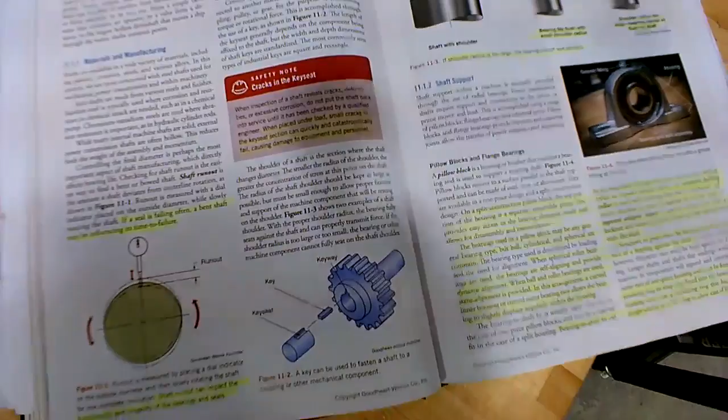So, some high spots in here. He said he was. He said he was going to join.

Okay, good. All right, so one of the ideas that we've already covered in gearboxes is the idea of checking run out with a dial indicator. They're showing here on this picture, seeing a shaft from the end of it, and then seeing the radial run out up and down like this if it has wobble to it. So that's the case no matter what you're checking.

If you go to something like this over here, you've got a rigid coupling here. If you separate these two, then you can check the run out up and down on the driven machine and on the motor the same way you did with the gearbox. You've got shafts, you can still have wobble this way, or the loose play in the bearings. So that stuff can be checked when you decouple them.

You can put a dial indicator here and then jerk up and down, or either rotate it, and you can check just by rotating it to see if the shaft's warped. You can check by jerking it up and down to see if you have a lot of loose play in the bearings. So that's your radial run out on the driven. Same thing on the motor end of it, but you got to decouple, take the screws out to do that. It's the same thing as what we did before.

You can check the axial run out. You got to decouple them, separate them, and put the dial indicator facing the shaft, and then pull in and out like that, and you'll check for worn bearings and all. So that's one of the preliminary checks.

Yeah, he's in. Hey, how you doing?

Okay, so anyway, they're just showing you that's one of the preliminary checks whenever it says run out. Run out is measured by placing a dial indicator on the outside diameter and slowly rotating the shaft. It can impact the functionality and the longevity of bearings and seals. So bearings and seals can be affected by run out issues.

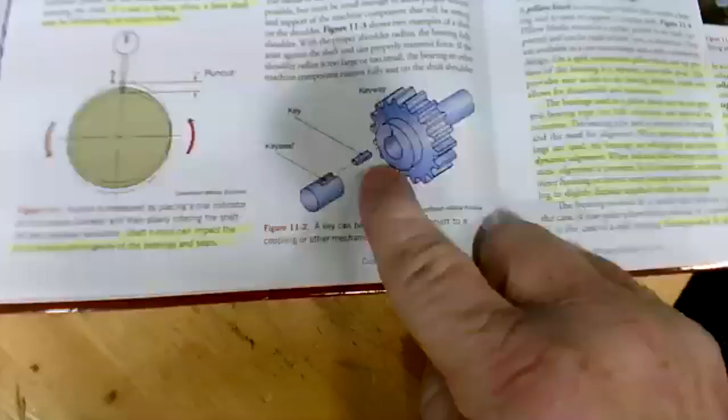If you've got keys that you're dealing with, you can look for a cracked key seat. The bed that the key goes in could possibly be cracked. That's another thing.

They get into different ways to support the shafts, pillow block bearings, showing the grease fit here. They're showing here how the bearing can fit against the shoulder of the shaft. Here you've got a 2-bolt flange bearing. You've got a U joint, or like a universal.

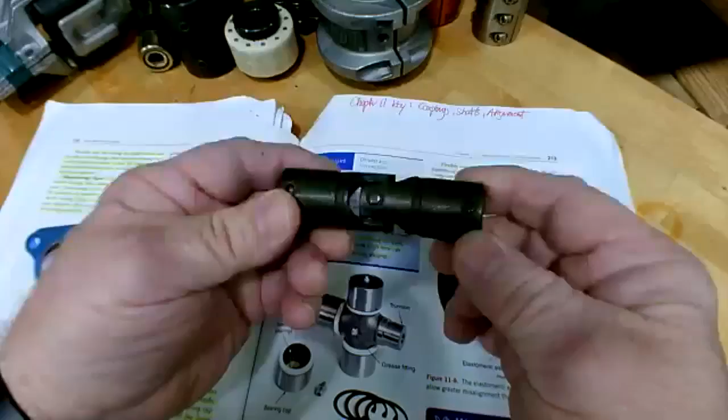Universal joints are like this one, to where you've got shafts, you got to drive something, but they're at an angle. So here you can drive something at an angle. I think like drive shafts on vehicles, you've got the universal joint like that, or knuckle like that. That allows for some misalignment there. And they're just showing you an example right there.

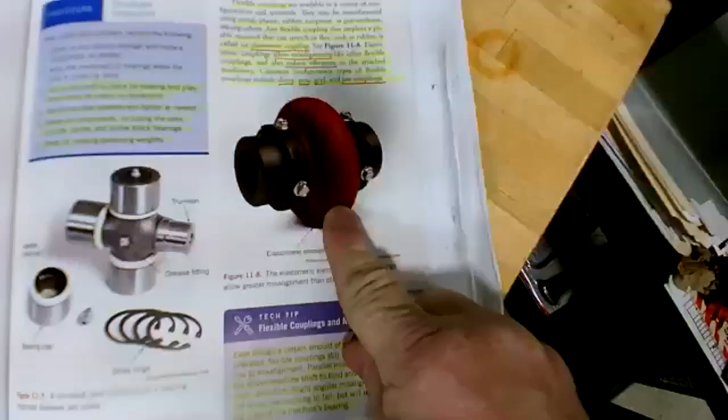If you read through all this stuff, here's another kind of coupling that has an elastomeric element in there. It's a flexible type of element that's going to dampen vibration, and it'll allow for a little bit of misalignment.

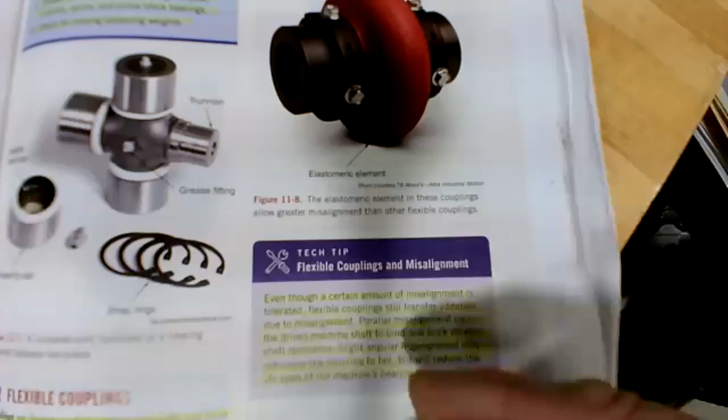It says here that for flexible couplings and misalignment, even though a certain amount of misalignment is tolerated, flexible couplings still transfer vibration due to misalignment. So even if you've got a flexible coupling, that doesn't mean you can tolerate misalignment, because a lot of misalignment means you're still going to transmit some vibration through that elastomeric coupling.

Parallel misalignment causes the driven machine shaft to bind and buck on each shaft revolution. Slight angular misalignment may not cause the coupling to fail, but it will reduce the lifespan of the machine's bearing. So you still want to shoot for perfect alignment as good as you can get it, even with an elastomeric type.

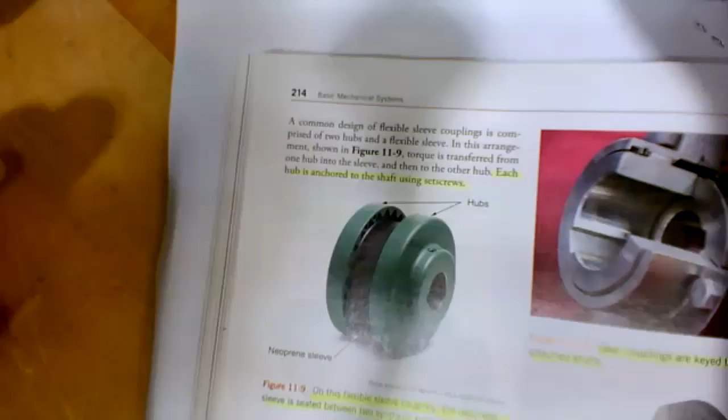Now here, you've got something called a sleeve coupling. It's got a neoprene sleeve between two synthetic rubber hubs. So here, we've got one right here, and it comes apart like that. That's something similar to that.

Okay, so that would be your element that you wear right there. If it grips, that's pretty neat. It's interesting how many designs people have come up with. So again, you've got set screws here that go onto your shaft, and that's a pretty neat invention there for design.

Then you've got something called gear couplings, and then you've got grid couplings. Grid couplings is something that I do have. There goes the gear coupling right there. I don't have one of those to show you, but I do have a grid coupling. So the grid coupling has a springy looking thing in there.

And let's go up. Don't get dizzy there, Brandon, with this thing floating around. So here you've got something called a grid coupling, and it comes apart. It has a shell, and there will be screws through there on each end, and there's actually a grease fitting here, so you would shoot grease into it. You have to put a grease fitting in there and pump it full of grease. And look at it, as that comes apart, there goes your grid.

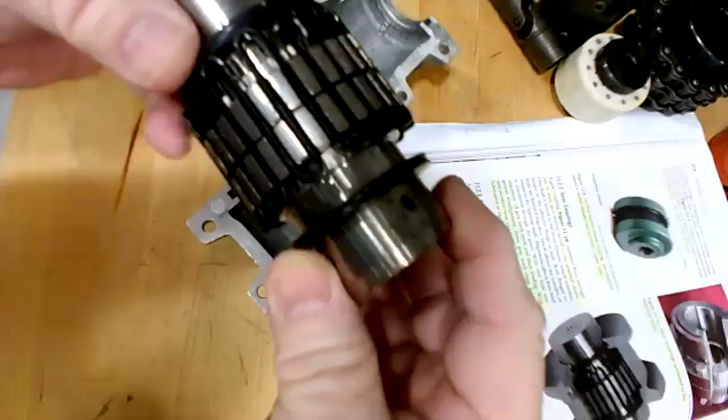And so it allows, you notice here, it allows some floating like that. But if this cracks and goes bad, of course you're going to be taking the shell off like that, and you would have to replace the grid itself. It also has seals in there, and the seals are going to try to keep the grease in there because it does have a grease fitting.

Right there, there goes your grease fitting in there. So it does need to go back in like that. You want to take a look, pass that around. You got those, okay.

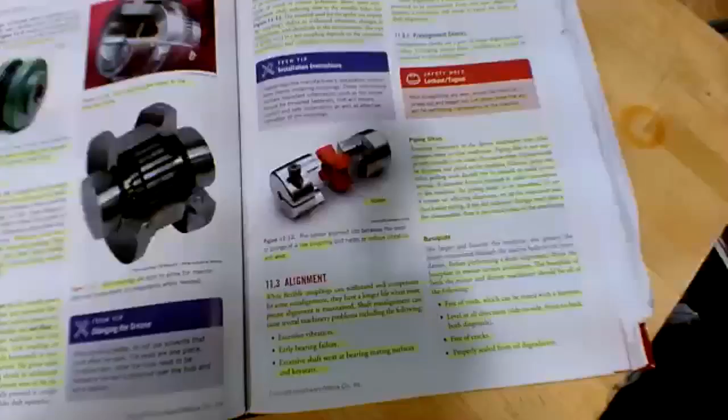Now, the next type of coupling here is called a jaw coupling. The jaw coupling is a three-piece unit that transmits power between two hubs. They're meshed together with the assistance of an intermediate element called a spider. The spider, made of rubber or various polymers, allows the misalignment while reducing wear to the metallic hub. The material used for the spider can impact the ability to withstand vibration, temperature, and chemicals. The type of spider used depends on your operation environment and your specs.

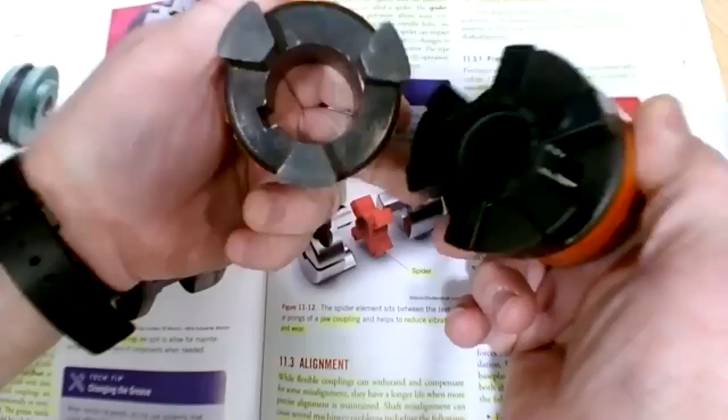So here we have a spider coupling. The brand of this one is called a Lovejoy. That's probably the most popular coupling that I've ever seen where I work. There goes the spider. And these just wear over time, and you start to get a whole lot of slop in there, a lot of backlash when they wear. You can picture that. That's easily seen there.

They work very well. They do allow some float, a little bit of misalignment. But you still want to be able to do alignment with them. You still want to try to align these. For instance, with a straight edge here. We're going to go with a straight edge method, and you'll put a straight edge across them, and you'll be looking for daylight under one or the other when they're bolted onto the machine. So in the beginning we go with a straight edge method, and then you can go dial indicator, and then you can go laser. So those are the three ways we're going to try to do alignment. So moving right along.

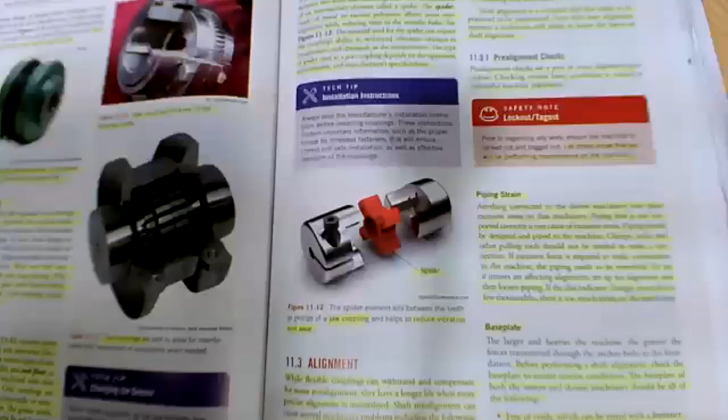There's some pre-alignment checks that you go through. Lockout, tagout is the first one, the main one. Checking for pipe strain is one of them. Anything connected to the machine may place excessive strain. Clamps, jacks, and other pulling tools should not be used to make connection. If excessive force is required to make connection, the piping needs to be reworked.

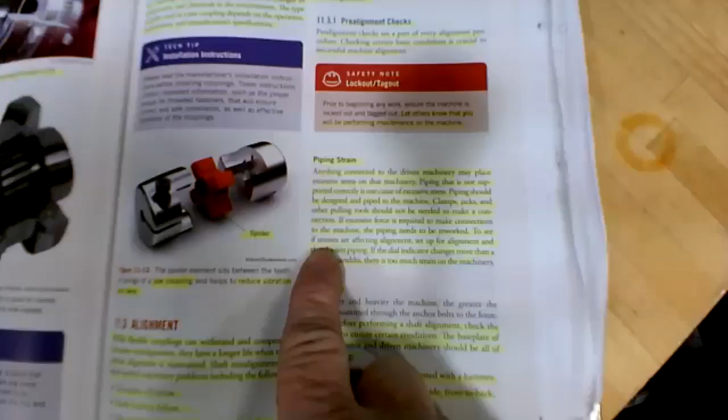To see if stresses are affecting alignment, set up for alignment and then loosen your piping, like maybe your unions. If the dial indicator changes more than a few thousandths, there's too much strain on the machinery. Does that make sense? So you can put a dial indicator on a shaft and then loosen the piping for the pump. And if you see a movement, then you got issues with your piping. So that's a good idea there for pre-alignment checks.

And then your base plate. Check the base plate for certain conditions, voids, make sure it's level, free of cracks, and sealed from degradation. Properly anchored with the appropriate hold downs, and that you clean it of any debris. And then checking the shaft run out, as I just said. The shaft run out is the same rules as it was with the gearbox. So your excessive shaft run out greater than 3 thousandths... just do all that.

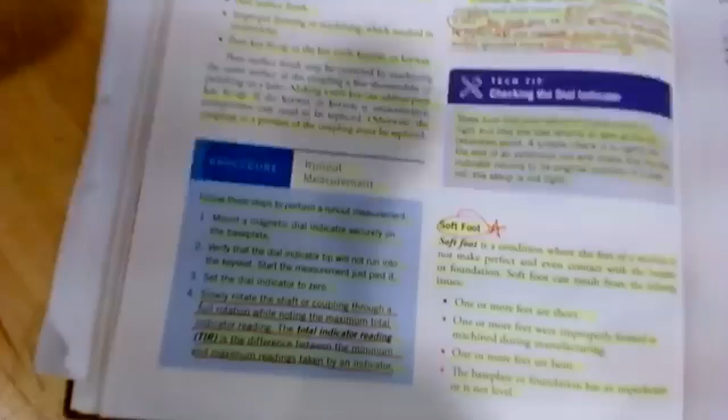Now, before we go further with that, there's some more couplings that they did not show in this book. Let's show those real quick, and then we'll get into doing an alignment. So you've got some rigid couplings that absolutely have no forgiveness whatsoever. See that? That's a plant coupling right there. It's got a keyway, and that thing's got to be dead on. Them shafts have to be dead on.

Okay. You saw the universal joint. There goes another rigid coupling there, with no play whatsoever. So that's rock solid there. Here goes an elastomeric type there, a different one. Pretty interesting, got a rubber feel to it there. Here's a different one here, just like a spider coupling. Like that, different brand.

Clamp, something like a square shaft. I've never seen one of those used on anything, but it's another variety there. And then you got something called chain coupling. This is very interesting here. So the chain coupling, your shafts would attach with set screws, and then you've actually got chains in there. You got some room for some float in here for the chain coupling.

And let's look at the, where's our, right here. Now, so there goes your master link. There goes the master link right there, and you pull. Oh, let's get the lights.

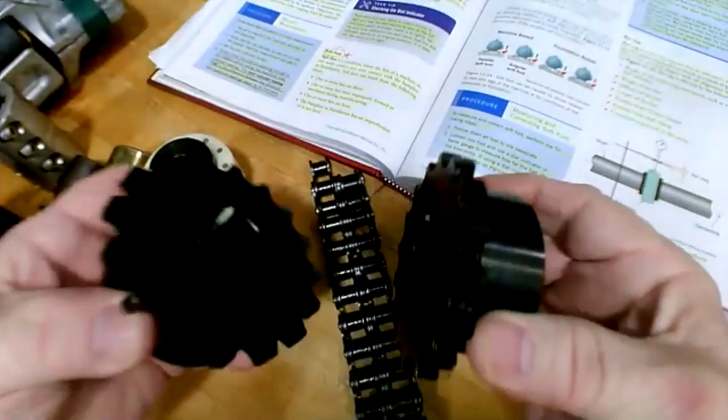So here you've got the master link for a chain coupling, and you pull that master link out like that, and it comes apart. So there you go, right there, and there goes your two pieces of your chain coupling. Let's get this up. Pretty interesting, huh? So it's like two gears, and you have a double gang chain there. That's actually the element that transmits the power. There goes your set screws there.

We'll line those up. You ever seen anything like that? Okay, you have. This thing's bad to the bone. In other words, like Ruben would say, that's bad to the bone there. You know, that thing ain't messing around.

What kind of machine do you have this on? My capper. And so what is it coupling together? Between the main gearbox and the drive motor. Okay. So it's pretty serious drive there. Real serious drive. Have you ever had one of these where the chains go bad? You got to keep them lubricated in our environment. Right, because you got wet chemicals and they're spraying them chains down with disinfectant every night on third. So they're getting some serious chemical attacks on everything in this plant. They last a long time.

Right. But isn't that interesting how somebody invented that? It's fascinating to see all the inventions that people come up with in just one subject like couplings, isn't it? To me, it's very fascinating.

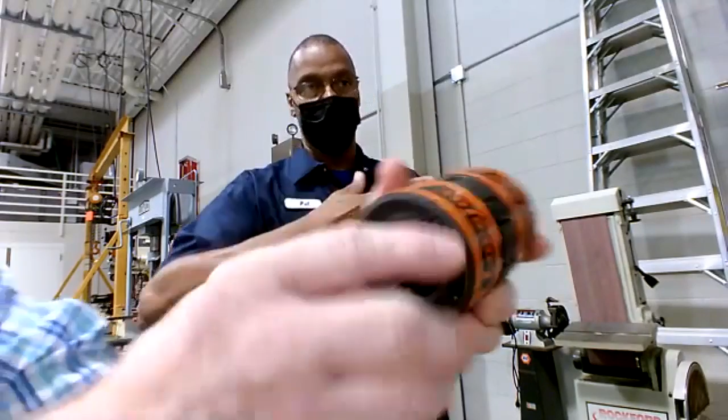We have to have those on the capper. So any slack at all will throw your timing off for the capper. Say that again. He can tell you from experience. On our cappers, we use this type of coupling because with the regular coupling, if you get any wear in it at all, it tends to float. It throws the timing off. So we have jars going through our capper. It has to be right on. If it's off just a little bit... That's what I mean. Got to be nice and tight. But yeah, it has to have some axial float a little bit, but not radial wise.

Okay, then this is just as much interesting here. What do you think that is at a glance? It's a nylon chain coupling. So with this one, we'll drive a pin out, and it doesn't matter which one we drive out. Looks like that one right there has been driven out before. So let me get something to drive that out, and we'll take that apart. Give me just a second. I need to get the small pin.

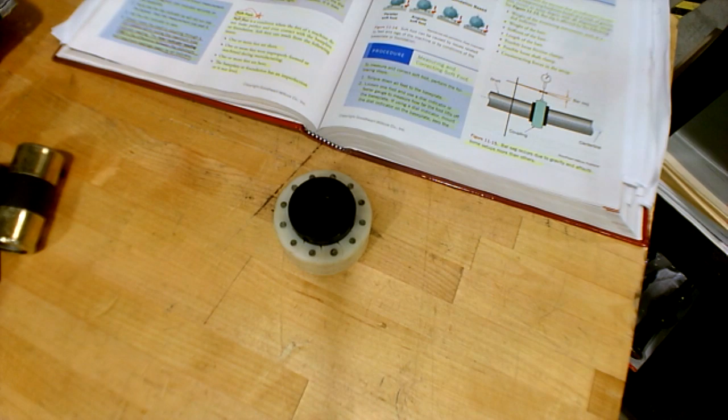Now, if y'all will drive one of these pins out, I don't think it matters which one. I don't see any difference in them, honestly, but that one right there's probably the one that's been driven out before. You can kind of put it up here where we can see what you're doing. And I'm gonna hold it like that. So we're using the flat pin punch.

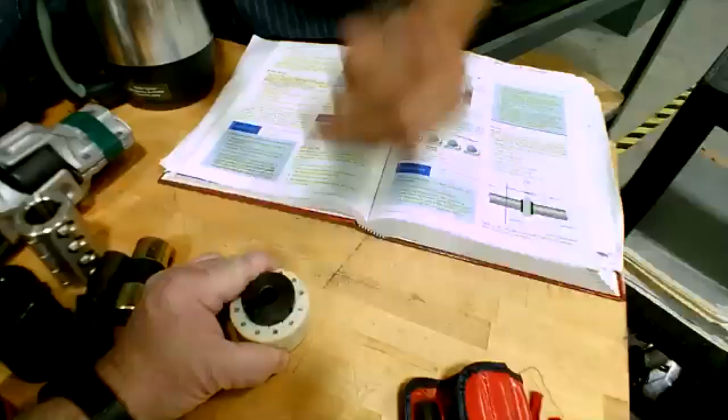Now we're gonna pull it out with some needle nose.

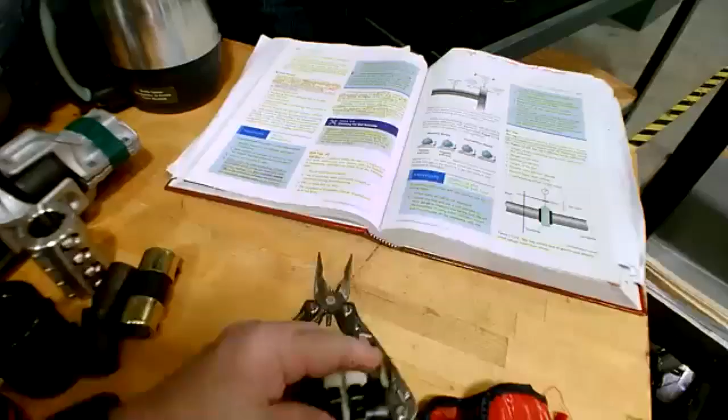And I'm hoping this one comes on out. Look at there. It's got some pretty good grip to it. If it don't make a wire out of it. Now, so we pulled that pin out. It's just going to come apart like a regular chain there. So there you go. You got the same deal there as with the metal one, but it's a nylon chain coupling. So ain't that something?

Interesting. Nylon chain. So food processing, that may be the thing for you. Chemicals. Pretty interesting, huh? Set screws here. You got a set screw coming in right behind the keyway. So that's to keep the key from slipping out. And then you got another one to bite down at a 90-degree angle. They come in from two angles with the set screw. So that's pretty good design there.

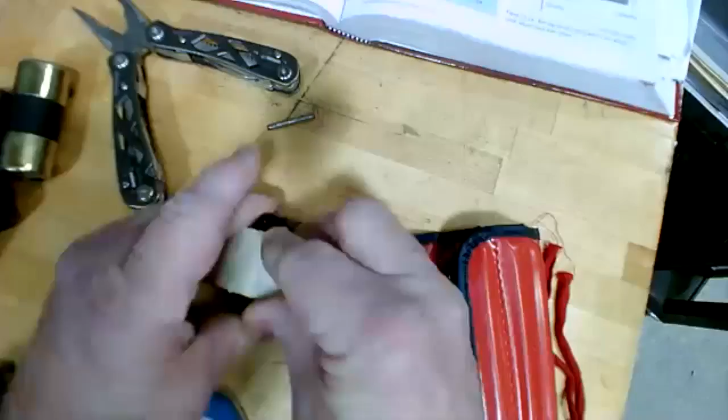We'll line those up like that. Close it up like that, and we're going to drive that back in. If you want, you can use the pin punch maybe to align them better. Look at there. So there you go, chain coupling. It's got a little bit of float to it. Anyway, so that's another variety there.

By the way, that was a set of Proto pin punches there. Real handy. These can be used for not only knocking out pins, but they can be used for lining up flanges like drift pins. If you don't have drift pins to line up flanges and you're doing pipe fitting, you can use these in place of drift pins. So that's a handy thing to have. It's not real expensive, and you don't have to buy something separate called a drift pin. So that's a pretty common thing to have in your tool case, toolbox.

So next thing is we'll go to a basic... one of the first checks that you'll do when you're doing shaft alignment is something we haven't talked about. It's called soft foot. Check for soft foot. Soft foot is a condition where the feet of your machine do not make perfect and even contact with the base plate. Soft foot can result from one or more feet being short. You got a foot floating, okay? Maybe on the motor or on the driven machine.

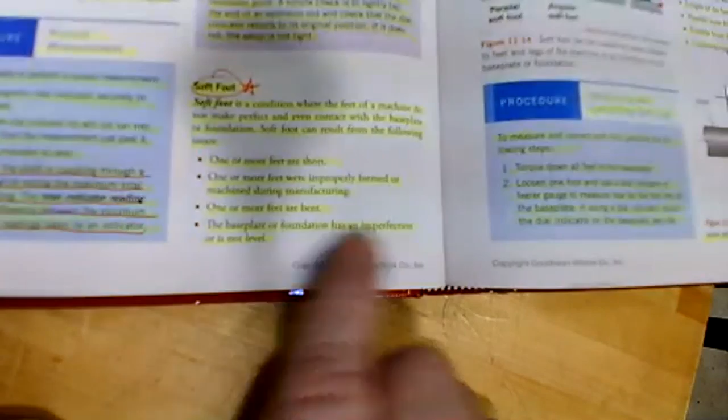One or more feet were improperly formed during manufacturing. One or more feet are bent. Sometimes you can get a brand new motor out of the box, and one of the feet may be bent if it's a thin base. The base plate has an imperfection that's not level. So basically you got to go around and check under the feet with a feeler gauge or shims to see if you find any gaps before you begin the process. You got to fill in the gaps to get rid of soft foot, so that when you go to tighten something down, you're not warping it. That's one of the preliminary things.

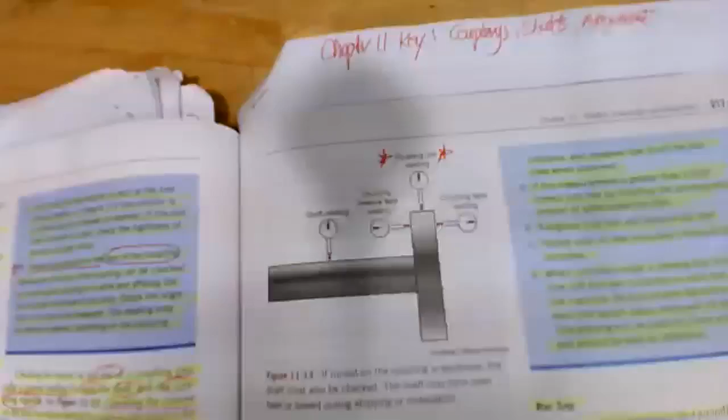And then here, they give you different angles for checking runout. You can get it from these different angles, depending on what you're going to be checking. Now, we're going to start out doing a basic straight edge and feeler gauge method, and then we go on to the dial indicator.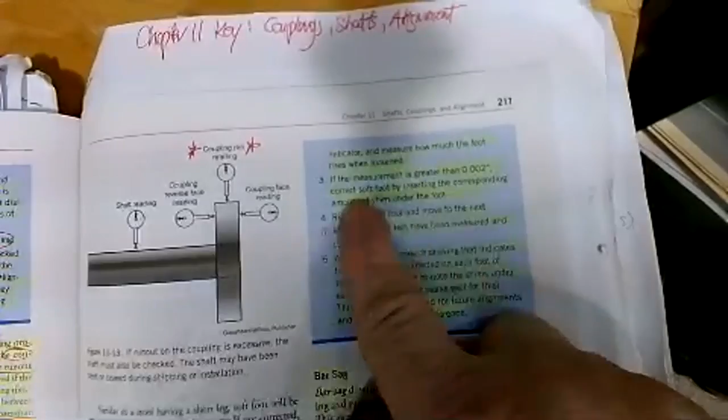So for checking for soft foot, here they say torque down all of the feet to the base plate, loosen one foot and use a dial indicator or a feeler gauge to check how far the foot lifts off the base plate. If you're using a dial indicator, mount it on the base plate, zero the indicator, and measure how much the foot rises when it's loosened. If the measurement is greater than 2 thousandths of soft foot, you want to insert the right amount of shim.

Now we got shim packs that come in all the small increments. We've got nice shim packs in these boxes here. Then you'll retighten that foot and move on to the next one. You repeat it until you have corrected all the soft foot. And then when you complete, make a drawing that indicates how it was corrected. You would make a note of your shim layout. That way, if you ever have to replace that motor, you got a note of how you shimmed it at the beginning. Okay.

They get into checking bar sag on your dial indicator. We won't get into that today, but depending on the weight and how long your dial indicator is, you may have some bar sag.

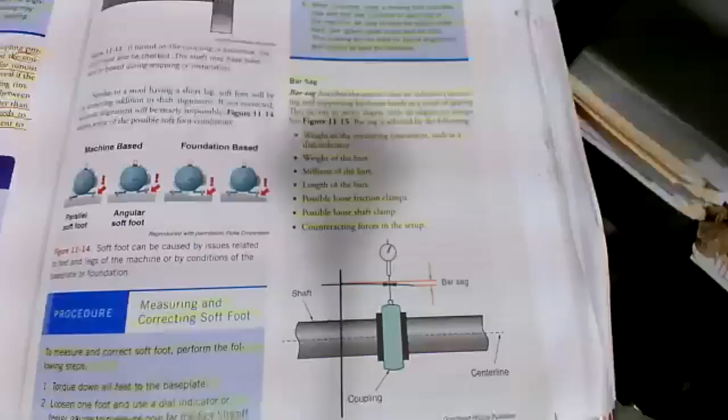And so, as an example, right here, whenever you set this up, you can picture if this is clamped onto a shaft here with a chain, that the bar, you could have a little bit of sag in there possibly. And the longer that bar is, if there's other attachments that are longer, it could influence the reading by the weight and the sag of this. Okay, so that's something that they get into.

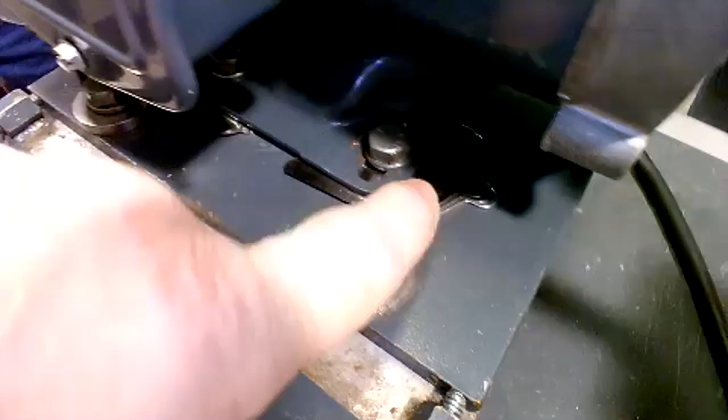Second here. You start out with some very, very simple tools that you always have. But even if you don't have a dial indicator where you're at, you're gonna have this stuff. This stuff is very cheap, very easy to have.

Here we've got a straight edge. That's actually a cutter for a lathe. Okay? That's actually a piece of carbide. It's extremely straight like that. That goes on a lathe. Okay? We're going to use that as a straight edge. And we want to loosen, like these are loose right here, right? They're loose. Even though they're not going to run that way, I got them loose right now so you can see that they're not bound together.

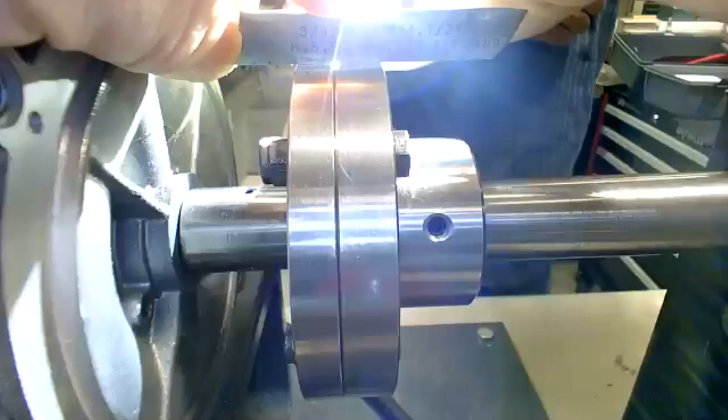Basically, what you want to end up with is you want to have it so that when you lay that up there like that, and for instance, if we were going to say that you couldn't have any more than say 5 thousandths gap in there, you would be able to come in like this, put that straight edge on there and shoot behind it, see, I don't see any gap in there. I don't see any. See that? And you can check it. Go at 90 degrees.

So yeah, if you want to hold that, we're going to shoot down this way. Maybe go say at 9 o'clock and shoot it up like that. And there's a little bit. See that little bit in there? You see that? Right there? So that's kind of what we're getting at. This is the basic feeler gauge method of doing it. You want to find out how much is there. This has already been done. We're going to take all of the shims out in just a minute and start the process. Okay. So here you go, the feeler gauge step.

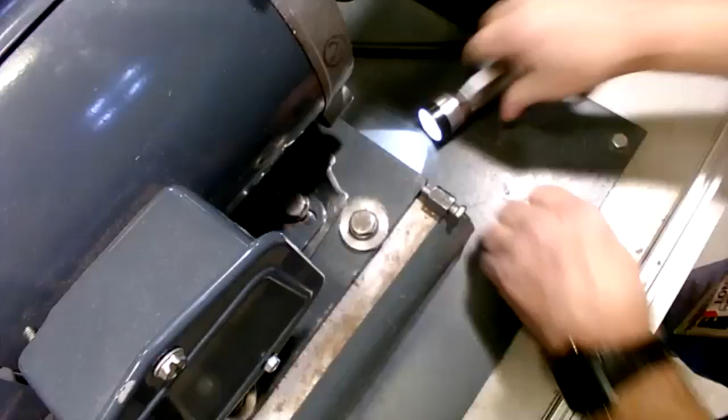If you want to find out what that gap is, let's just see, is it maybe like 10 thousandths. We could just try to get it in this thing, and then go from there. So I've got that in there like that. And 15's not going to fit, so it's better than nothing. Just shoot it on down and stay to the center. That's 11. That's 9. Where's the 10? Let's just try 9. There's a 9 in there. And there's 10. That's 10 thousandths right there, just rough.

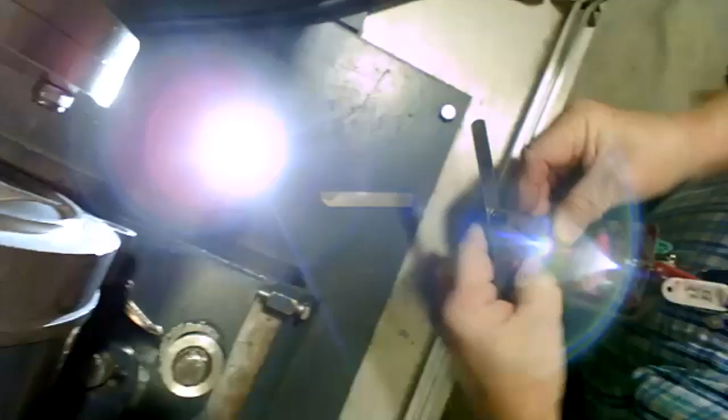So we go here, and we're going to see if possibly 10 is maybe 10. And it won't. So it's actually tighter than 10. But it's probably going to be more like 5. Okay? Let's shoot down 5. If we feel some drag, we're going to say that they certainly did a nice job on it. Shoot down to 5.

See, I've used this because you see how straight that is? That's a piece of carbide covered by this.

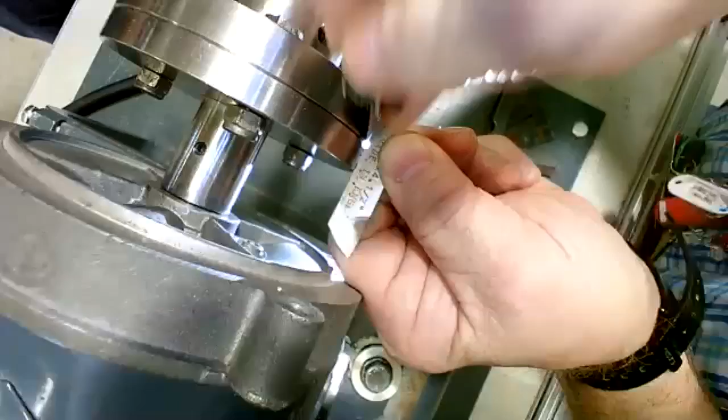I feel the difference. It's actually about a 7, about 7 thou. It's pretty comfortable. On the top, it's perfect. So, but I let that go. Absolutely, I let that go. That's fine, there's nothing wrong with that.

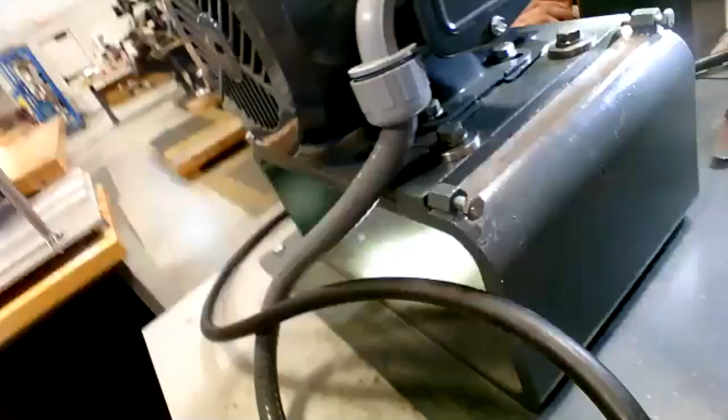So we're going to start out now, if you shoot the camera right here, we're going to remove these shims, take those out, start from scratch. And if you redo this, we're not even going to make notes of how much shim to clear. On here, you have an adjustment jack bolt on the side, so you can do the uniform movement with these jack bolts. You also have some play here on the feet of the motor, and then also on the base plate. But we're going to leave the driven machine alone. We're going to assume this is maybe a pump that you're driving, and it's already plumbed in, already piped in, so we can't move it. You don't move the driven machine, you match the motor to the driven, because this is always the one you're going to match up. Okay? Any questions so far?

Okay, so you can go ahead and take all that out. Just get our tools out, get all that stuff out, and start down the line. And again, we start out with a basic feeler gauge.

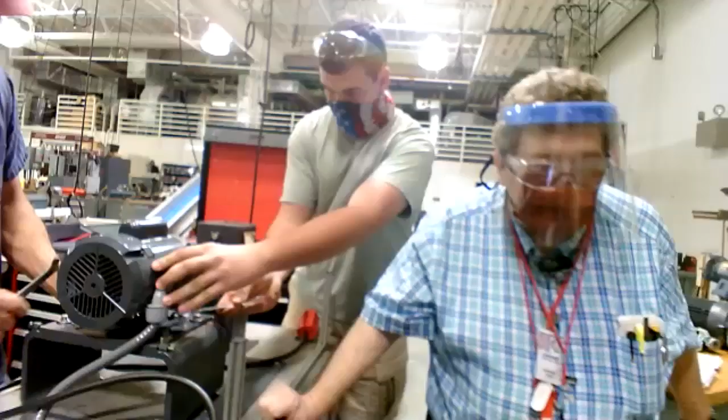And we are locked out here. We got a lockout device. That's very important. It's not just a rule we have to keep up with, it's something to keep all of your fingers that you're going to need, all 10 of them. The good Lord gave you 10, and you need all 10 from the cradle to the grave. You need them. So I might could do without my pinkies, no, well, take that pinky sometime too.

I broke that finger right there one time by not locking out the machine. You can see right there where it grew back together. Broke it in 5 places. All because I didn't lock the machine out. Somebody had bypassed something on the machine I didn't know about. They did a really severe bypassing of something, and I didn't know it. And that wheel would come down, the spot would have come down on my hand, and it broke my finger.

And I had to relearn. I played guitar, I had to learn how to relearn. Well, I'll show you how to. That's a C chord right there. That's a C. When I learned how to do it without the middle finger, I did. There's a C without the middle finger. There's a D without the middle finger. There goes a G without the middle finger. I started out when I broke it, I said well, at least I can play bass guitar. I said yeah, I'm not going to give up. So I went home and I pulled my bass out, and I said wait a minute, I still got 3 fingers, and a lot of chords just 3 fingers. So I come up with 3-note chords. I can still do it. D, C, G, E minor right there, boom, right there. I can still jam with 3 fingers, I can still switch it.

So get you about a 5 thou shim, and shoot under each one and see do we have any soft foot. You can use a feeler gauge here. Let me tell you what it is. Actually, the book said that if you had greater than 2 thou, just check them. I used to take a 5. Seven. That's 5 right there. Keep going around and see if you have soft foot. Just check under these. So is it touching there? You got it on all of them?

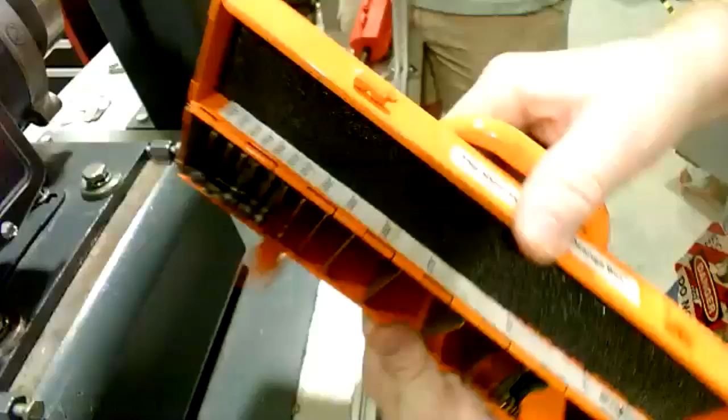You start out, let me get the shim pack out. Here, keep the camera on that. Here you got an active shim, pre-cut shim set. Now in there, they got the shims in them, graduated thicknesses. Start out at 1 thou, 2, 3, 4, 5, 10, 15, up to 20, 25, and so on. Now them gone, I've got other packs that's got more in there. So you can try to fill the gaps in so that it's as soft as you can, between using these and using some of those over there.

Actually, if you simply go by the method they said, go ahead and bolt all of them down, tighten all of them down, and release them one at a time and do it their method. Now I've seen two different methods. I've seen a different method online.

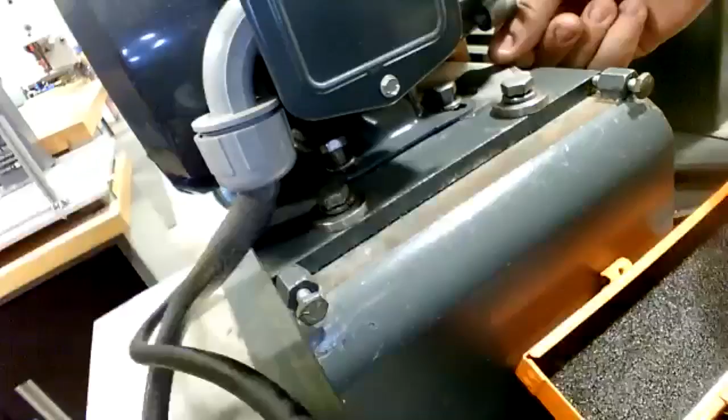Once you back up and try the method that they mentioned in there, pull that out, tighten all those down, and then loosen them one at a time, strictly by what they said in the book, and just see what kind of result you get like that. Tighten them down and then loosen them one at a time.

Here what they're saying is torque all of your feet down, loosen them one foot, and use a dial indicator or a feeler gauge. We can use the feeler gauge for speed, and we can do the dial indicator to measure how far the foot lifts off the gauge plate. We can actually do the dial indicator that fast too. Okay, dial indicator, we get this.

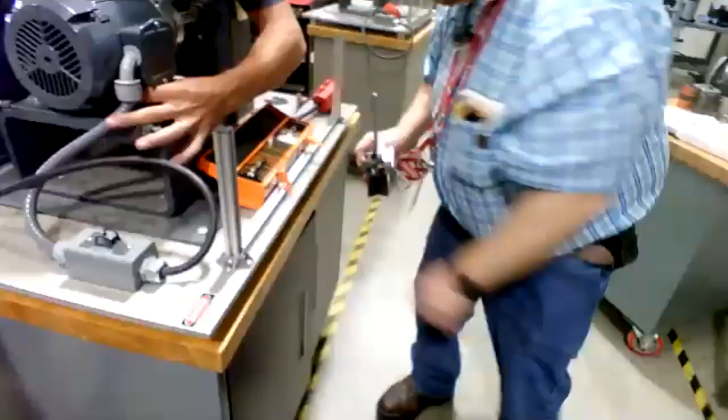That's a fast thing to do there. Somebody gave me one of them the other day. Really? Oh, good.

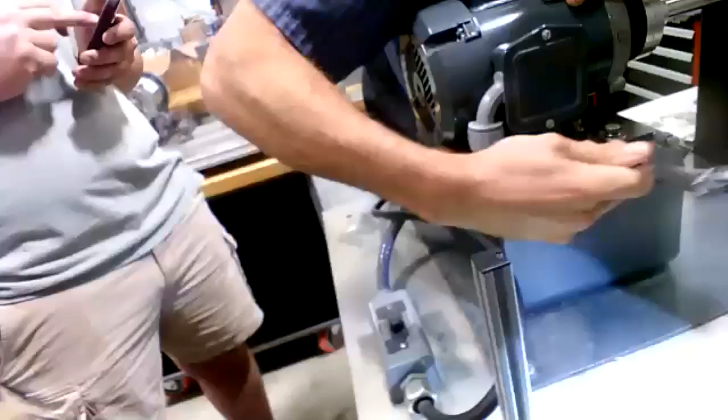We can move on if you want to. Work good for you. Set it on there and then just roll it. All right, read them. Now pull the shims out there. Yeah, pull the shims out.

I've never seen this method being done. Now tighten that one down too, and then we'll check the lift with this. I'm always open to anything I haven't tried. Whoever wrote the book, we're going to find out what our results are. Everything's tightened down nice and tight. Okay, so put the dial indicator on there now.

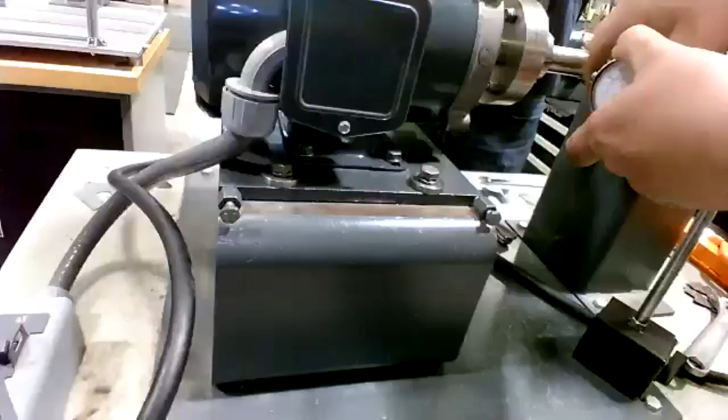Here's the dial indicator we had over here in these trainers that have the wing nut on there. Yeah, so this has got the wing nut. I don't know what happened to that.

But here, the dial indicator, the magnetic base, when you tighten this, then it sticks to the metal base. Come on up here, and we may or may not be able to make that happen. Checking in there that far in. We're going to try it too. That's going to be real.

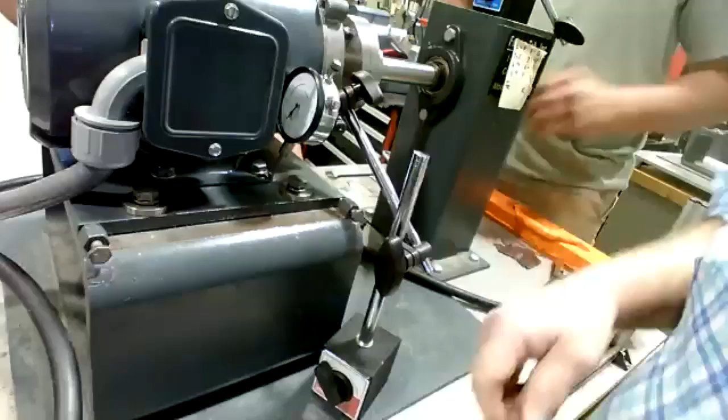If you can shoot in, maybe bring it in where we'll zero it. We're going to come in this side and see what we're doing. Now I've got it zero. Come around here and look. It's on zero. Now, if you'll loosen it, hold on a minute.

This ain't tight here either. Tighten these here back. Here. All four of these. Yeah, so we're... that would definitely have an effect on it.

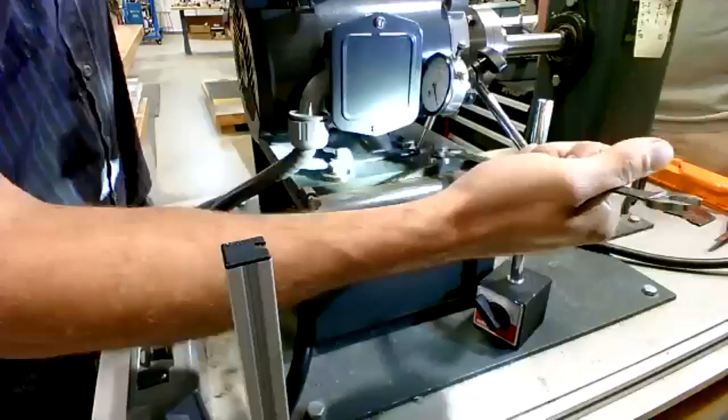Right, so now we're going to come back in here and shoot. We're going to take off that foot there. It's at an angle, that's the best we can do. You can't move this straight on with it. So we're in there like that. We're going to zero again.

See that right there? We're on zero. Now he's going to loosen the motor foot, and just kind of do it maybe from this angle right here. Let's just see what kind of...

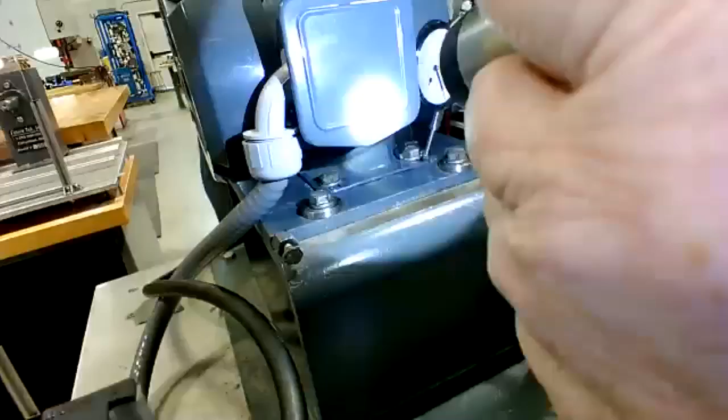Yeah, it's showing some of this right there. So if you look right there, we're looking at how many thousandths, Pat? Maybe about 8. So, 7 or 8. Okay, so we put the shim in there now, according to this method in the book.

You shim it according to that amount. So you take care of your soft foot, you do them one at a time that way. So whatever will fit in there the tightest, you slide that in, and then you tighten that down, and we move around to the other one. That's the method that they recommend.

I've never seen it done that way, but we're going to try that. Okay, I mean, I have enough respect for different authors and stuff that we'll do it and see how it turns out.

So we're going to loosen the magnetic base here, and he tightened this one, and now he's moving around. See which one you're doing now. Well, you're gonna put a shim in now. Does it have drag to it? Yes, sir. Okay, good. So he put that amount in there, he feels a little bit of drag on that.

Nice and tight. Torque it down. It's tight, torque it down there. Torque it down, you can get rid of it.

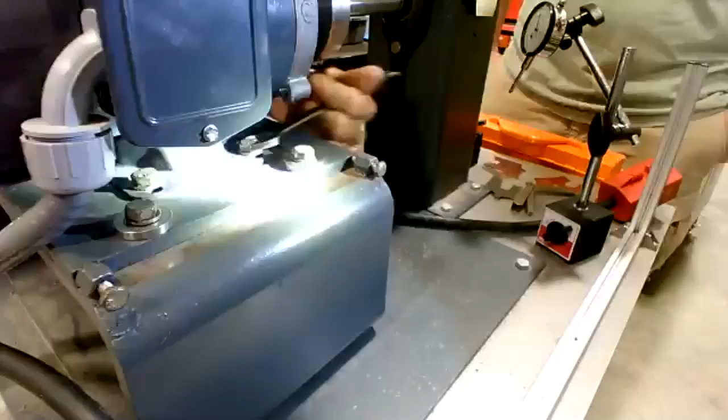There you go. Now your next one, and this is going to be extremely difficult to do a dial reading. Well, you got to put it on first. You need to put it on there first. I got to put it on there first. So that one's going to be hard to actually do. Put it on last, we could do it last, yeah.

Let's go around and do the other one. I'm wondering if we could actually do it a kind of crude way. I actually took them off of the motor box right here because it's going to lift the whole motor when it lifts, right? So I guess we might be able to pick it off of this edge. But let's go around and do the other one.

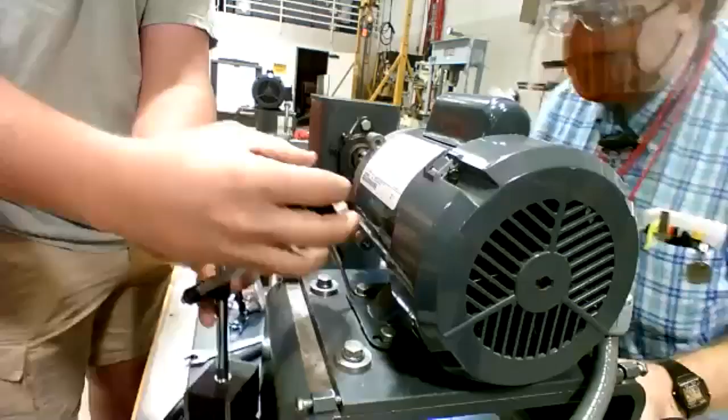Here you got a wing right there. That's a lot better there, set up. And Patrick, you might want to come around this way.

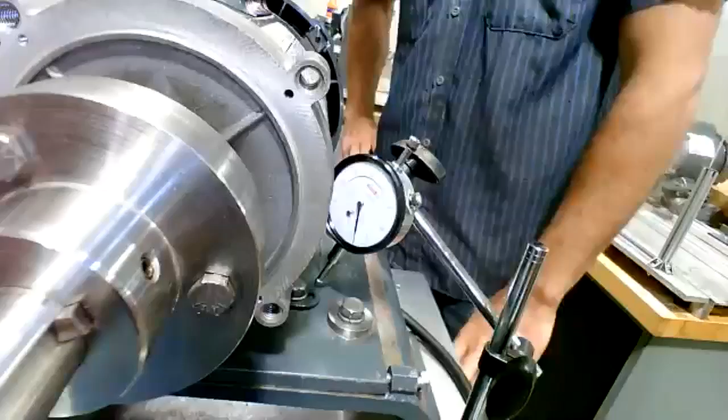All we're doing at this point, this is not really finalizing the alignment, it's just getting the soft foot so you can begin that.

You will put the straight edge up there in two places and check the gap, and we may have to move the whole thing one way or another. And then...

This is not what you would call a fast time. In some cases in plants, you may not have time to do all of this. But you may end up bolting everything down and then throwing a straight edge up there and going out there. They're not giving you time to do all of this. Just in reality, you know.

Good, and back side. Right there.

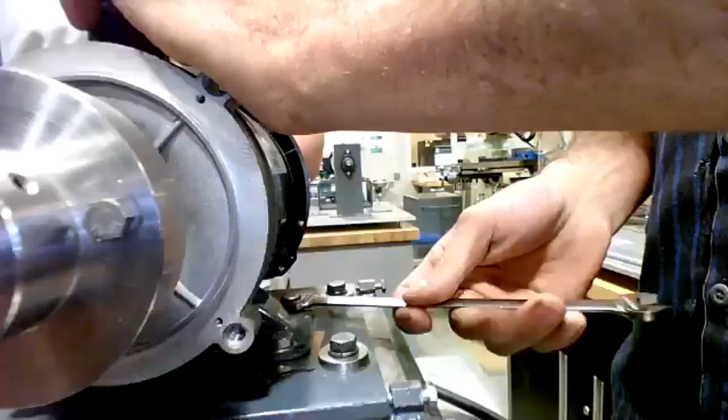It's good. Yeah, I got good eats. I've already eaten. Huh? It's not breakfast, lunch time. No, I'm supposed to be business.

We'll then tighten up before you put your thing there. There he is.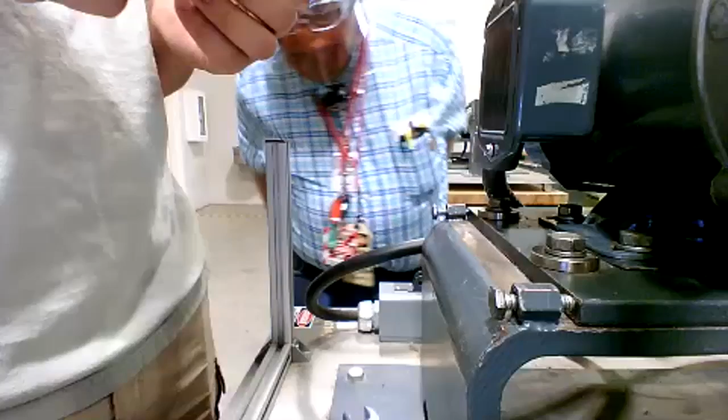And to hurry up. We got a bunch of Spanish girls at the town I work at. They say, I wish you would hurry it up. Hurry it up, not hurry it, hurry it up. And one of them, they grab my shirt. He pulled, you tell me you fixing my machine. I can't make my production. Not working, you hurry up. He said, you go help. He said, you go help. Yeah, it sounds like he's saying, you go help. Whoa. We got a bunch of nice Spanish girls out there. And sometimes they grab me by the shirt. You come work on my machine. You hurry up.

We miss the people we used to work with more than the place, you know. Sometimes I still see some of them girls at Walmart. It's like a kind of family reunion when you see them.

I got them girls hooked on peppermint candy in the plant. I used to go buy at Cracker Barrel some kind of stick peppermint. I'd get 2 or 3 bags, take that thing through, walk in and pass them around, and they got rocking this time. If I ever went a day and didn't bring them no candy, one of them, her name was Sylvia, she looked at me, pointed her finger, and said, you come here. I said, what is it? She said, you know, you ain't bringing me no candy today? I said, I'm out. She said, when are you going to give us some more candy? I said, I'm going to go to Cracker Barrel. That's what they're doing. So I had to go back to Cracker Barrel and get some more candy.

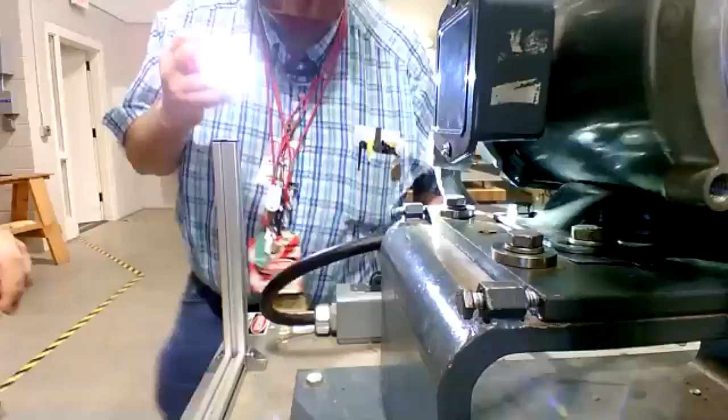All right, so at this point you got rid of your soft foot. Then what I would do next for a basic straight edge alignment is plug your straight edge up here. We know we got the couplings ordered.

Go ahead and throw a straight edge up there. Where's that piece that we're using? Little carbide piece. Put it up here.

We put this up here, and we look to see if we have any daylight, and we got a little bit on this side. See that? On the other side, let's find out how much that is. It ain't much. You would check that with a feeler gauge. You use this, so across the top. This is a little bit lower than that, and if you push right here, that's where you'll see the gap at, like that, because it is a little bit lower over there.

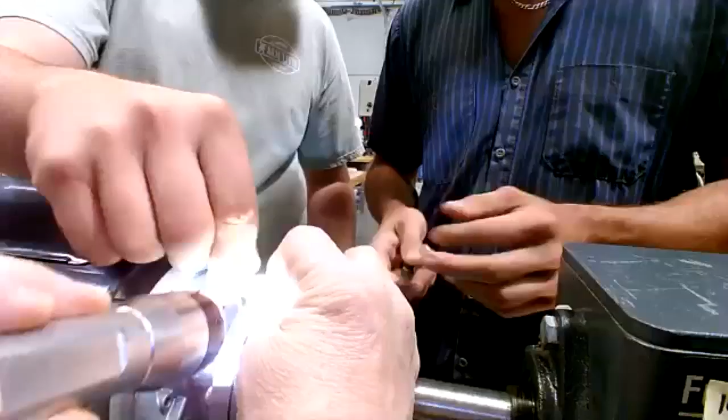You see that? Very little, almost none. How much was that? You actually got more this way than you do up here. These jack bolts can be used to bring it that way.

Brandon, how you doing there? I'm doing all right.

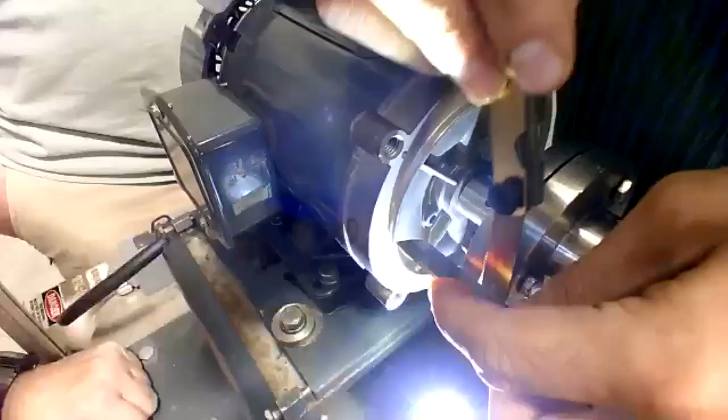Yeah, comes with experience, I tell you, out there man. Seriously, kind of what I worked 20-something years, man, actually 22, shimming machines. If we had rolls of shim stock on these rolls, if we had to cut them with our tin snips, and here was the preset thicknesses that we had. We had 5 thousandths, 10 thousandths, 15, 20, 25, 30. We had them in certain increments.

And you got to a point where you could feel it, and just by feeling you knew what thickness it was, because you had them all in there over time. Not because you got a computer brain, and not because you got calibrated. Well, your fingers, I guess, they do kind of get calibrated after a while when you look at something. Same way with sheet metal in the house, well, I can look at this.

Yeah, exactly. Hey, well, that says 5. If it says 5, and I feel that, and I get used to that, then I could go blindfolded and feel something. I could tell you which one is 5, not because I can measure that, but because of the feel, the bend, how well it bends.

So we got to listen. So what we have to do here, look, the video, that's fine. When this bumps, it moves and it has to be turned back on. The camera does. Okay. It actually loses connection a little bit sometimes when it gets bumped around. Just the USB connection.

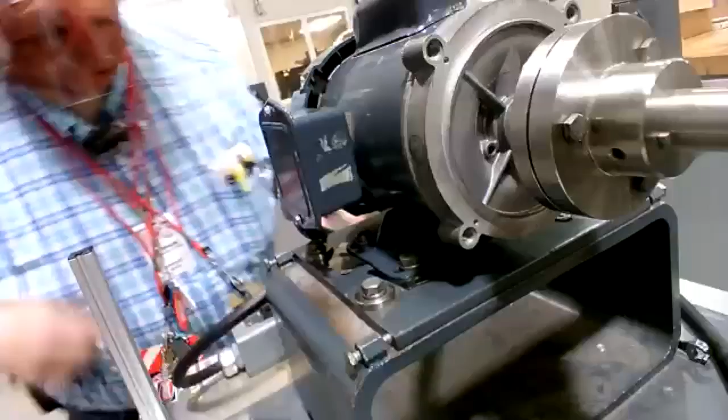So we got to take the motor and go 20 thousandths that way, and we're going to use these jack bolts here. So if you want to see these, the jack bolts, you can bring them evenly that way and move the whole thing. Let's get a bird's eye view here. If you look here, you got jack bolts on this side.

On this end, you loosen these jack bolts here, and you loosen them the same amount. And then come on this side, and you turn these the same amount by counting the flats on the bolts. If you want to move both sides the same amount, you count the flats. If you go, say, 2 flats or 3 flats, you would go 2 or 3 flats on this side, and it would take the whole base plate evenly instead of skewing it.

So that's what we'll do on Thursday to finish this up. We've run over class, and I don't want to keep Patrick tied up. So we're going to pick it up right from this point Thursday. We'll finish this alignment, and then we'll move on to dial indicator. We'll actually throw the dial on there to do a verification that what you've done is suitable.

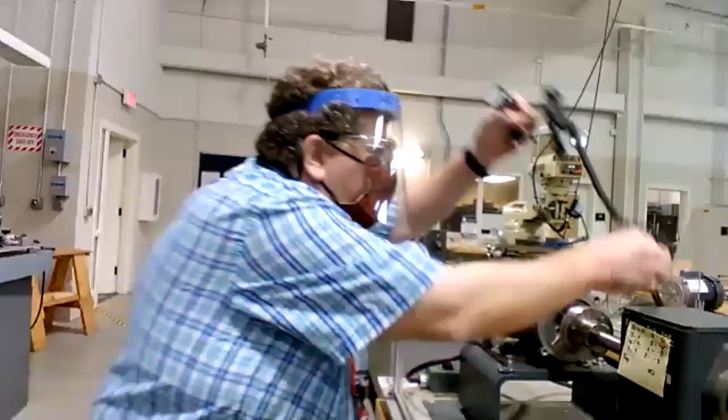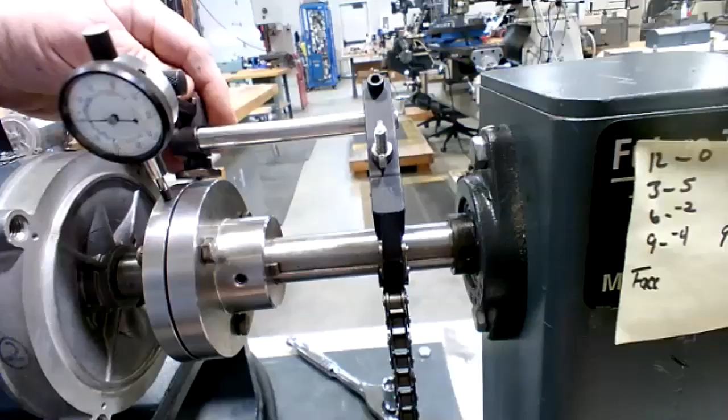And see, this is gonna strap on like this. Straps on something like that. We're going to start out like this. We'll zero this out and then run it around once the alignment's done. The alignment's not done right now. If you start out at 12 o'clock on zero like that, and then you bring it around, bring the camera to the other side and just see however much it's off.

So how much do you see this off there? Two. Just by 2. Now that's pretty darn good. We knew that the vertical was okay, right? The vertical was all right. Now let's shoot it this way and see what we got. Actually pretty darn good there. Let's go back up this way.

Actually, I don't have the plunger engaged. See that? The plunger's not engaged with the gap in there. So we've got to bring it down. The plunger has to be engaged somewhere mid-stroke in there. You got to bring it in like that, and I've got to lock it in here with the thumb wheel behind it.

So the issue was it wasn't even engaged. So you got to go halfway in the stroke roughly like that, and then snug up the thumb wheel like that, so there's some engagement in there. Then you start out with zero. I didn't even have it set up in mid-stroke on the plunger. Okay, so we'll start out at 0, and then we bring it on around.

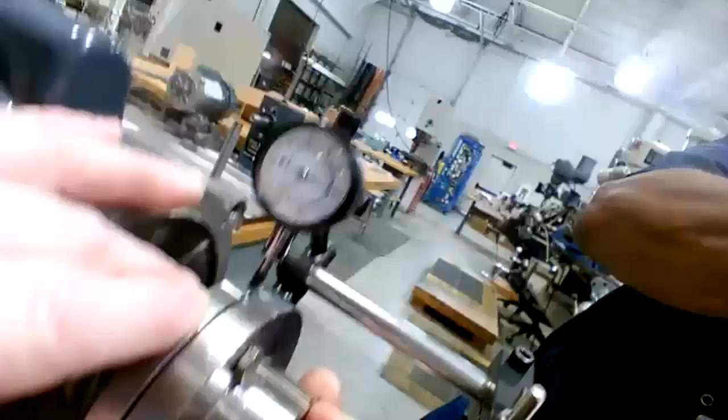Now see, it's showing. If we start out in the travel there, you see it start out at 0. Actually, go here, it's 0 like that. And then as we go around real easy, you see it growing like that. So you can see the change in it there, about 15 thousandths. And then you see it down in there.

It's actually better. It's only like 2 thousandths there. You know, we knew that vertically it was good. We knew that it was very close vertically. It's within like 2 thousandths vertically. But horizontal was where it was off. And you can see that. See that amount there? So it looks like it needs to move about 15 thousandths roughly.

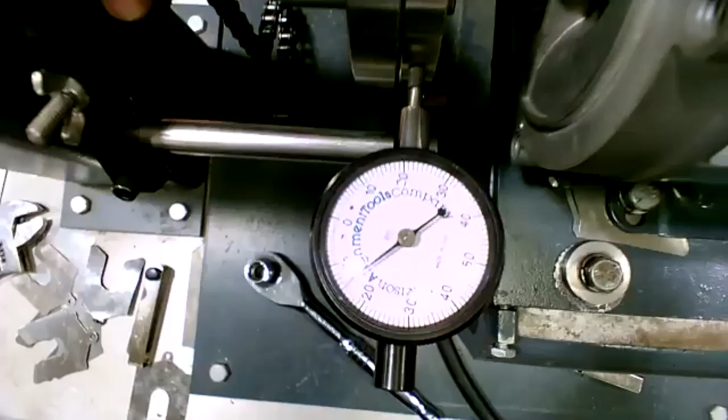And that's what we said it was going to do, right? Mm-hmm. We were going to do that with the base plate. So this is agreeing with what we said, that horizontally, east-west wise, the motor's got to move to correct that. So the dial indicator can be used to confirm what we've been seeing, and we're back at 0 there. See? So this is just another way to see it.

At the 9 o'clock position, this is where you have the most error. Back down at 6, you're actually within tolerance there. And we knew that. We knew when we threw it across here like this that we were extremely close. So that was your up, down, your north-south reading, which was actually good. You were within 2 thousandths there on the dial.

So we'll pick up from this point Thursday. We'll finish this thing up, get it dialed in good, and then turn it on, and all that good stuff, and then we can go with laser. We have a laser hookup, the laser, if you want to bring it up this way. That's a set right there that we'll get into as well. They clamp on. And it's a pretty sophisticated thing that we're going to go through together. Anyway.